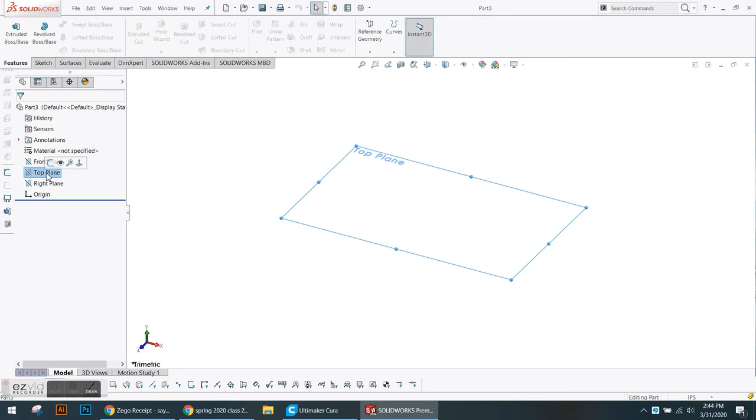So today I'm going to show you how to make a simple mold. It's a one-sided open mold.

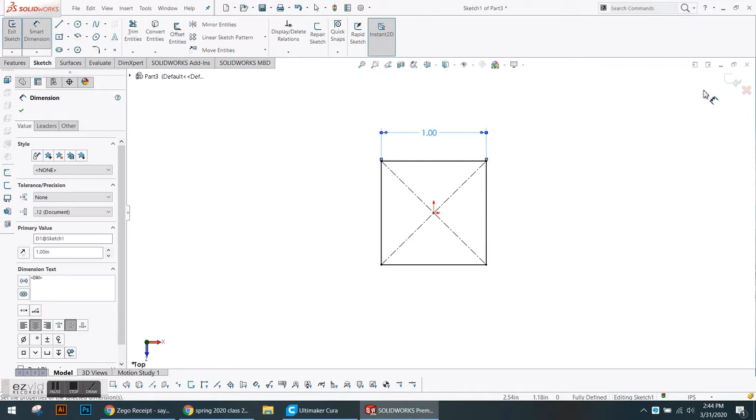First we start on the top plane. We make a square. This is going to be a chocolate mold. We set the two sides equal to each other, measuring this to be about 1 inch. And extruding this about 0.35, a little less than half an inch, so we're thinking of a thickness of a chocolate.

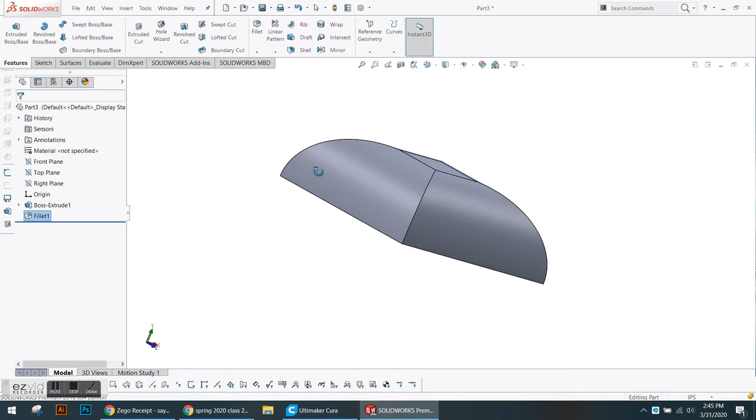As all the molds go, we need a draft or a very large fillet. The minimum of the draft is between 3 degrees to 7 degrees. So we do a generous fillet, leaving the top flat for a little bit of text on top.

Now we have sharp corners. Let's get rid of those sharp corners as well, with a smaller fillet, maybe 0.1. Okay, now it looks more smooth. Actually, it looks like a cube of chocolate.

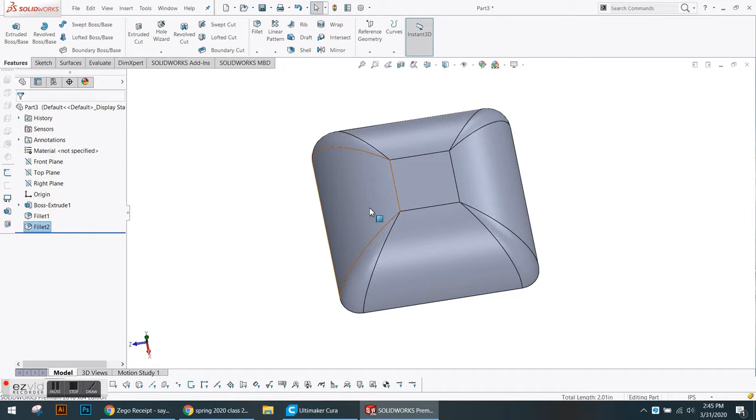Now we're gonna go to the top portion and basically either add a logo or a text. We start out by putting a line, a construction line for placement of our text, and adding whatever we want. This doesn't have to be a text. You guys can bring a logo in or just extrude cutting whatever graphic we want to the top.

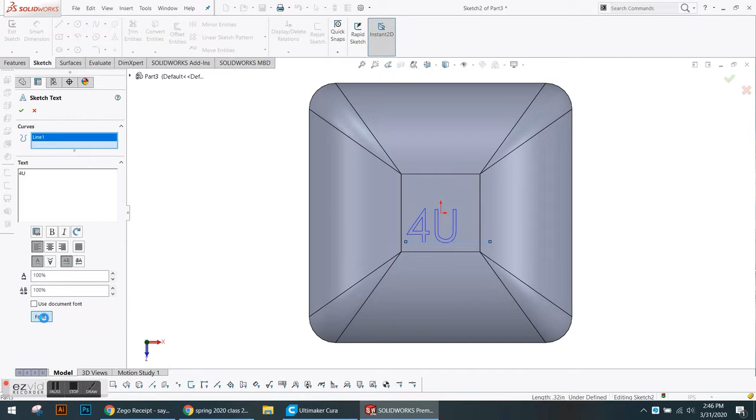So this is going to be called For You. The font's too small. I'm going to go and change the font to bold, especially when we're making a mold. It's better to have large cavities.

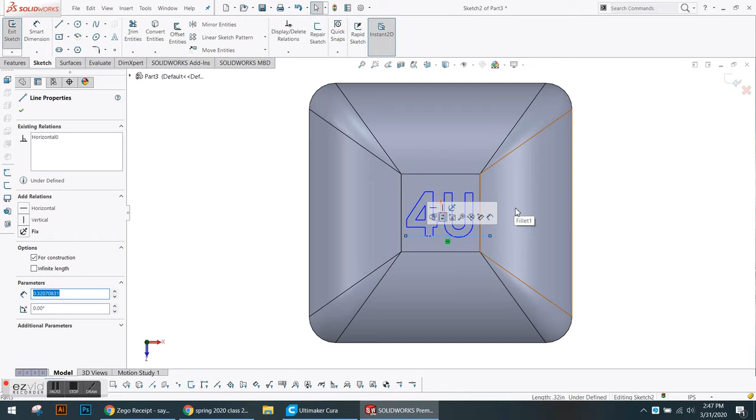Now it's a little bit too big. We're just going to go down a little bit so we get the perfect size. Okay, it looks good. I'm not worried about centering it yet. As we know, the text moves with the line, so now it's more centered.

It's looking good. And we're gonna make an indent, so we're gonna cut this just a little bit, maybe 0.02 inch.

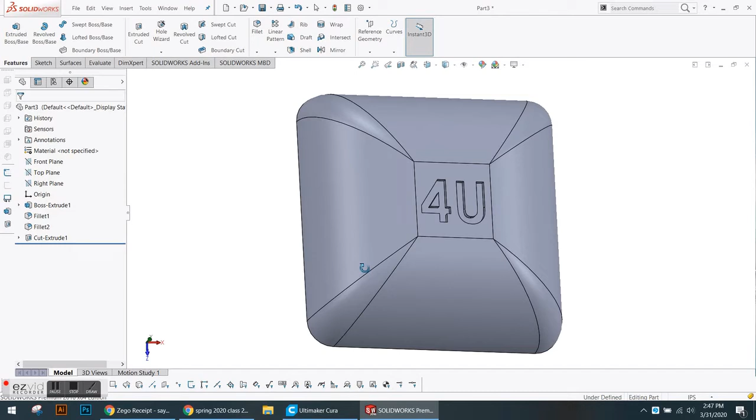And we'll say okay. Alright, so this is the positive part of the mold, but the mold needs a negative. So basically we want the negative side to actually fill in the mold with either water, chocolate, or whatever open mold that you can think of.

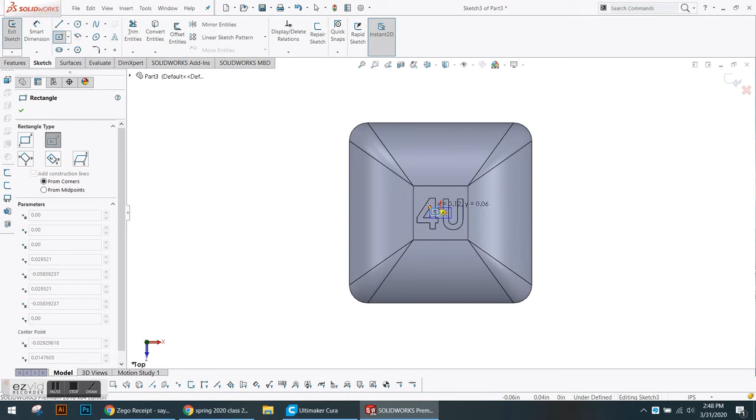So we're gonna go back and build a second part to this file. We go to the top plane again, making a form. This could be any form. I just chose another cube. So we're making sure this is a square again, containing this whole form. So it's larger than our chocolate. Setting these equal, making sure it's a square.

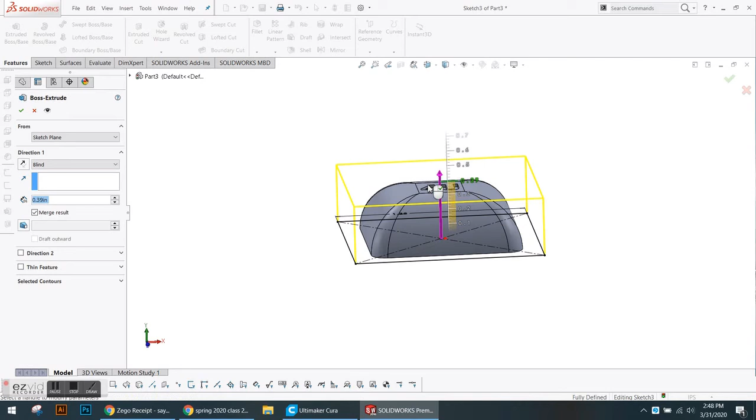And now extruding it to cover this whole thing. Yeah, it looks about good. Just to make sure, I'm going to go to 0.5. Okay, now we know this is right.

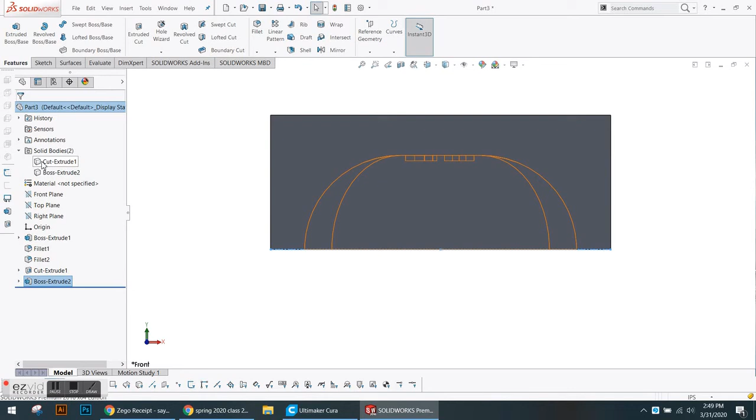However, we need to make sure they're two separate entities. I'm going to uncheck merge result. So now under bodies, there are two bodies. There's a positive and then there's a negative.

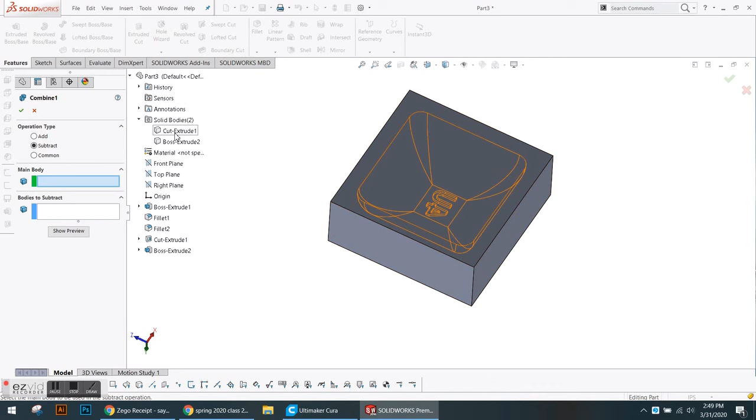Now we need to subtract the positive out of the negative. So we're going to go under insert, feature, combine. Make sure subtract is chosen. The first question is main body, second question is subtracted body. So we open up the tree, select the main body first, and then the subtracted body.

And now we have a negative form built. So here it is, a simple mold.